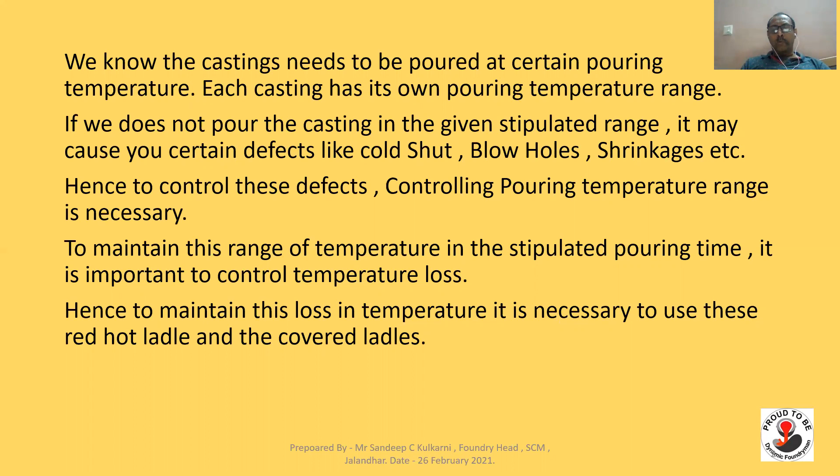To maintain this range of temperature in the stipulated pouring time, it is important to control temperature loss during pouring. Hence, to maintain this loss in temperature, it is necessary to use red hot ladles and covered ladles. In this video, we are going to see further details about it. Let us take an example here.

We have one part, a DFG housing, which is thin walled, wall thickness 5 to 6 mm, having casting weight of say 40 kg, and its bunch weight is say 50 kg. Now we have an induction melting facility with a 1 ton furnace available. We have to pour minimum 20 boxes to empty out the entire metal from the furnace.

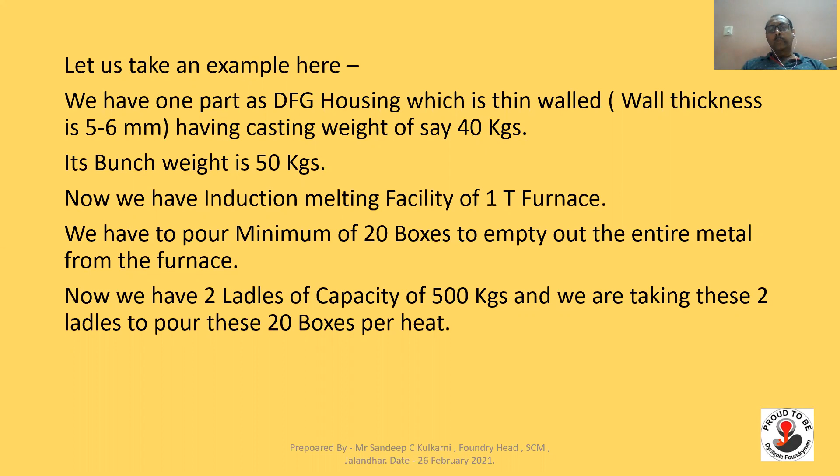Now we have two ladles of capacity 500 kg each, and we are taking these two ladles to pour these 20 boxes per heat. So by using these two ladles, we can empty out 1 ton of metal from the furnace. It means we have to pour 10 boxes minimum per ladle. Now we need to define the pouring temperature range for the part.

The highest temperature recommended for this part is 1400 degrees centigrade to avoid shrinkage defect. Above it, it may increase the shrinkage tendency of the casting. So we cannot go above 1400 degrees centigrade.

We cannot go below 1370 degrees centigrade for this part, considering the possibility of cold shut and blowhole. Cold shut particularly, because we have seen the wall thickness for this casting is around 5 to 6 mm. So we cannot go below 1370 degrees. So we have to maintain 1370 to 1400 degrees centigrade as the stipulated pouring range for this casting.

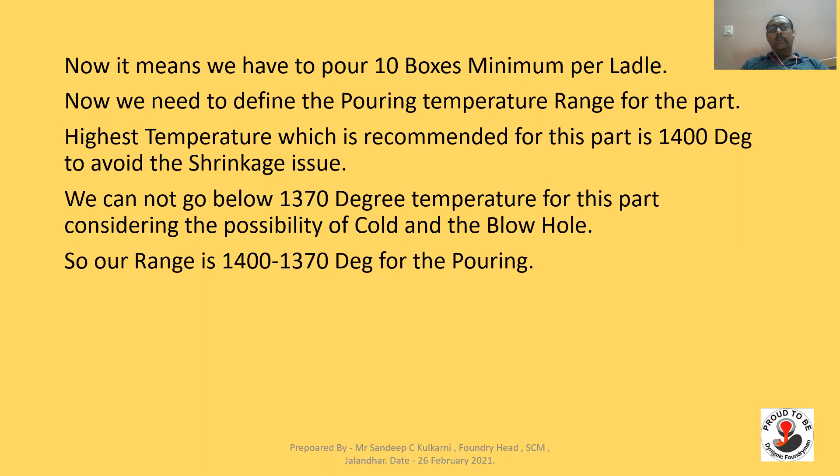Now it's a big challenge to maintain this temperature range of 1370 to 1400 degrees for the pouring of these 10 boxes per ladle. Hence, we need to understand the various factors that can reduce this temperature and work on these factors to maintain this temperature range. One, temperature loss per minute.

Number two, ladle diameter. The more the diameter of the ladle, the more the temperature loss, because more surface area will be in contact with air. So the more the diameter, the more the surface area, and the more the loss. So we have to consider ladle diameter as well.

Distance to be traveled, or pouring time. It should not be more than 6 minutes. The reason it should be 6 minutes is, one, you have to maintain the pouring temperature within the range, and secondly you have to ensure that your inoculant does not fade, because after 6 minutes there are chances that your inoculation effect may fade. So it is important to maintain the pouring time as well.

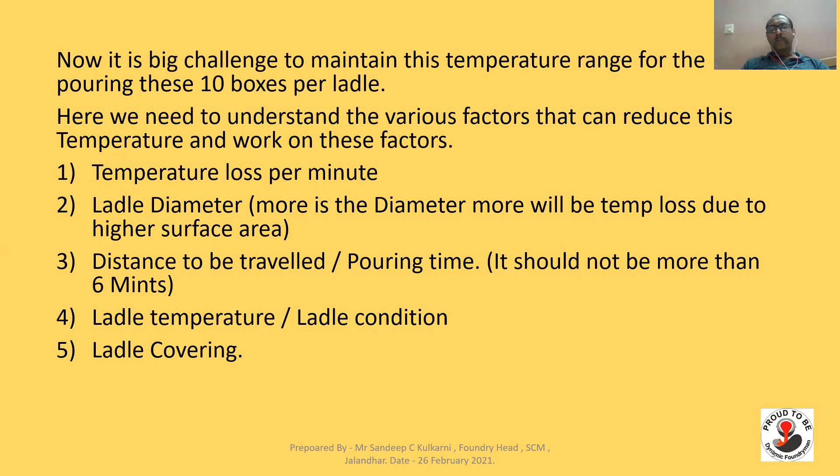Ladle temperature and ladle condition are very important as well. Then ladle covering is also going to be a critical factor to maintain this pouring temperature range. Hence, here it becomes important to reduce temperature loss per minute by using a red hot ladle. Use ceramic or any other type of covering mechanism to reduce the radiation loss during pouring, which will help you reduce temperature loss per minute while pouring.

Use of a hooter to get exact pouring time, to avoid pouring after the stipulated time, will help you to maintain the pouring temperature in the given specified range. Measure pouring temperature at the second box and second but one last box to decide the next pouring strategy based on actual reading and the specified temperature range.

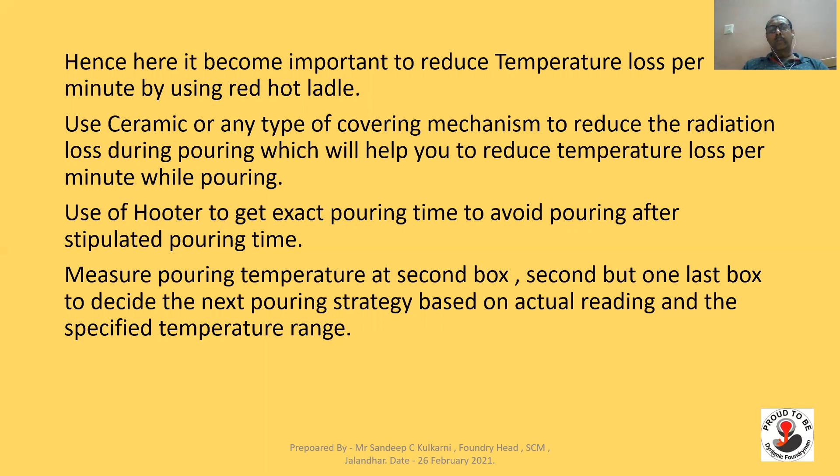For example, if your temperature for the second last box is say 1370, then you have to stop the pouring, because if you go for the last box, it will go below 1370. So this will help you to reduce your rejection. It will help you to avoid pouring at low temperature. So it is very important to measure the pouring temperature at the second but one last box so that you can save the last box from getting rejected.

It is observed during some experiments that we have done that by using a red hot, preheated pouring ladle, and by keeping the ladle covered, one can get a temperature drop of maximum 3 to 4 degrees per minute. So even if we pour for 6 minutes, the temperature loss will be maximum 25 to 30 degrees. With this loss of 25 to 30 degrees in 5 to 6 minutes, or 3 to 4 degrees per minute, we are able to maintain our temperature range of 1370 to 1400 degrees centigrade. For that, you need to use a ladle cover and red hot ladle for the pouring.

Whereas the study shows that if we pour the ladle without cover, this temperature loss may go up to 40 to 60 degrees in 6 minutes, which is almost 8 to 10 degrees loss per minute. This may give you shrinkage at the first box and BH and cold at the last box. So 40 to 60 degrees means if you take the first box temperature as 1400 degrees centigrade, your last box temperature may be 1340 to 1360, which is way below the specified range. And if you try to maintain the last box temperature at 1370, you have to take 1420 at the first box, which will give you shrinkage tendency for the first box.

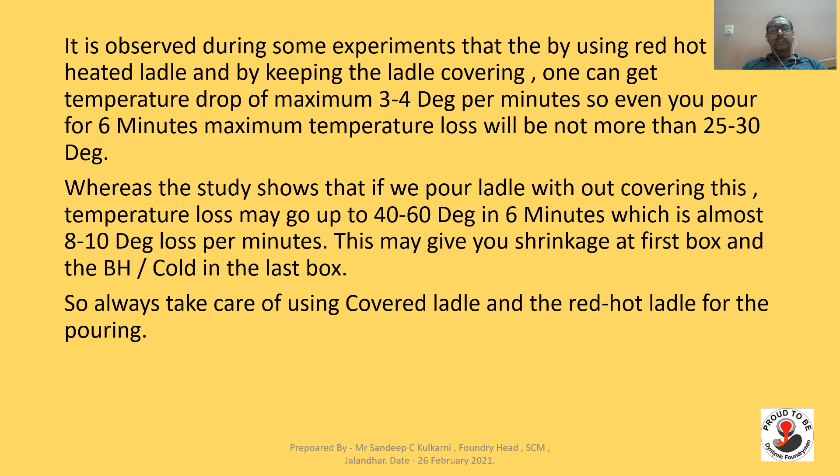So by not using the pouring ladle in a red hot condition and without using covering, you will put yourself in trouble of getting shrinkage tendency or getting cold or BH tendency. So it is very important to follow the discipline. So always take care of using a covered ladle and red hot ladle for the pouring.

These are some of the pictures of a pouring ladle covered with asbestos sheet, or any covering that can be used. Any type of covering can be used. Here you can see a ladle covered after pouring to maintain the temperature in the ladle, reducing the temperature drop. Then you can see a red hot ladle for good pouring practice. It will help you to reduce the temperature loss during the pouring. And the third one, you can see a pour with a ladle cover to reduce drop in temperature.

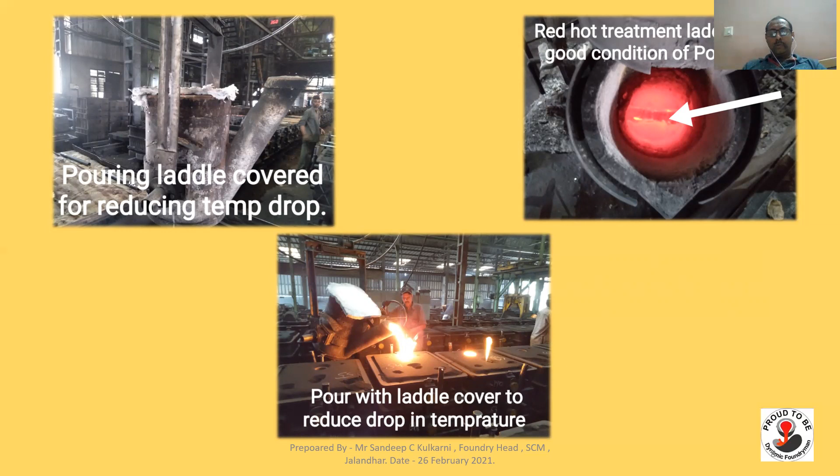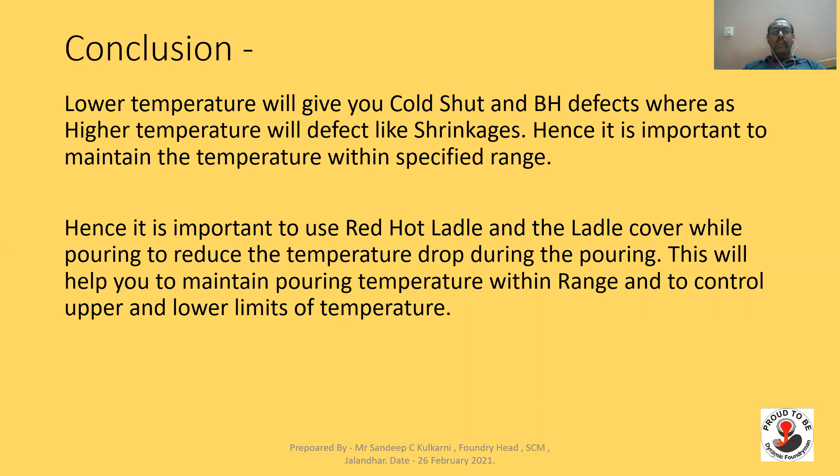Conclusion: lower temperature will give you cold shut and BH defects, whereas higher temperature will give you defects like shrinkages. Hence, it is important to maintain the temperature within the specified range. Hence, it is important to use a red hot ladle and ladle cover while pouring to reduce temperature drop during the pouring. This will help you to maintain pouring temperature within range and to control upper and lower limits of temperature.